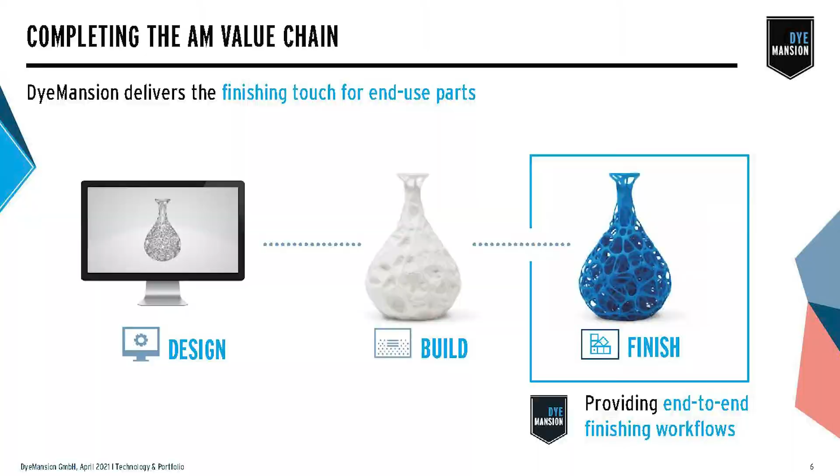So the design side is a big factor here. How do we design a part to get better? How do we then print that part to make sure it's going to work the right way within the post-process chain? These are all things that we've learned really well as a company, and we're trying to continue to educate the industry as we go, to make sure that we can all produce the right types of parts, the right ways, and have the right mindset going into it to enable that very end result.

So the way we think about this is additive manufacturing. The goal of it is to create this as an everyday unit. How do we start thinking beyond the prototype, getting these parts now into the environment to become everyday parts?

One basic way to do that is kind of camouflage. Get them into the market, get them into the areas where they're not totally noticeable right off the bat. In order to do that properly, we have to have the right type of finish where they start to replicate things that exist currently. If we're replacing a part, it's got to look a lot like that part we're replacing. If it's something totally new with a crazy lattice structure, we might have to design that lattice structure with a proper finish on it so that it applies properly into that application.

So at DyeMansion, we really continue to think about that same vision always. How do we enable the future of 3D printing to become everyday reality, everyday life? That's why we pride ourselves on the post-processing chain to create that enablement.

We do that mostly through the two different facilities we have, to help educate, and again, to create the opportunity to produce parts and also just give a basic user experience. So we have our main headquarters outside of Munich, Germany, and then we have our new facility in Austin, both of which have all of our technologies there.

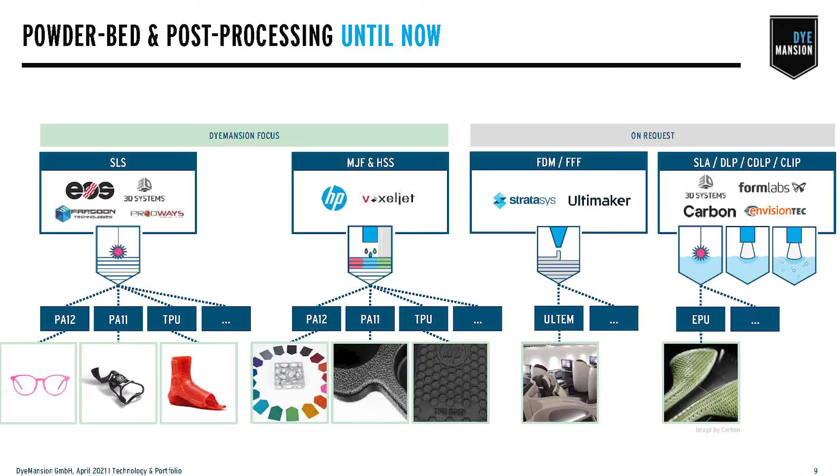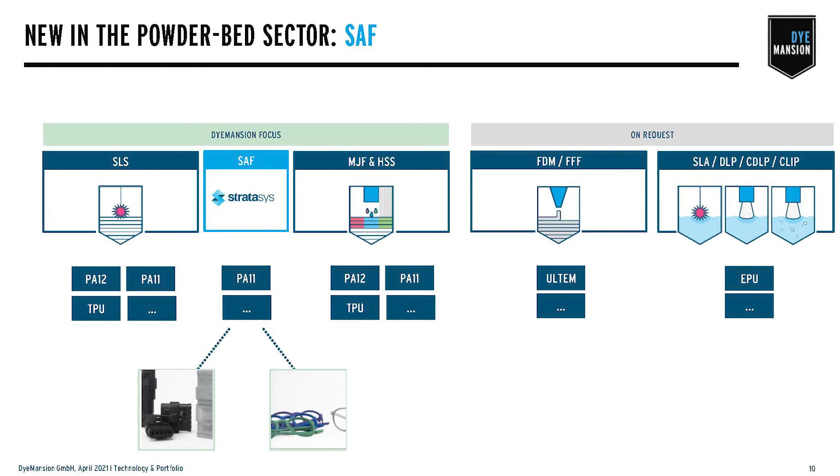Now what's even more exciting is that we can look at what's next. We always want to see what's next in the environment, and that's why we have Tim up here. What we're going to talk about mostly is where does this new material, this new process lie within our lives, and how can we continue to push it forward. Right now, the brand new technology behind SAF and the PA11 material that's out right now is something we can fit directly into our process chain. What we were thinking about, and why Tim is up here in the first place, is something super exciting for us to announce.

We did do a press release yesterday, but officially in person we can announce that Stratasys and DyeMansion have agreed to work together and create a partnership and a true alliance to enable applications at the end of the day. What that really means is we're combining the strength and market power behind the history of Stratasys, both the technologies from both of our teams, to push it forward and create a complete reference architecture for high-value end-use parts and volume according to that, or adjacent to that, all through AM. So in order for you to understand a little bit better, I'm going to hand it off to Tim for a few minutes to talk more about SAF technology and how that starts to lay into the future life.

Let me see if I can get technical. This right button means forward, right? Works so far, okay. Awesome, look at that. All right, thanks everybody. Is there a trick to this? Okay, press it about 4 times and it works.

So it's about Stratasys. A lot of you are probably familiar with us, but when we got our start, we were locked into one technology, FDM. FDM, as you probably recognize, is very good at low volume, high value parts. For the longest time, that's what Stratasys has done, even when Stratasys increased its portfolio to have FDM and PolyJet - by nature they're high value, low volume parts. That's awesome, right? But there are 7 different technologies defined by ASTM, and only recently Stratasys actually has expanded. We're into 5 technologies now.

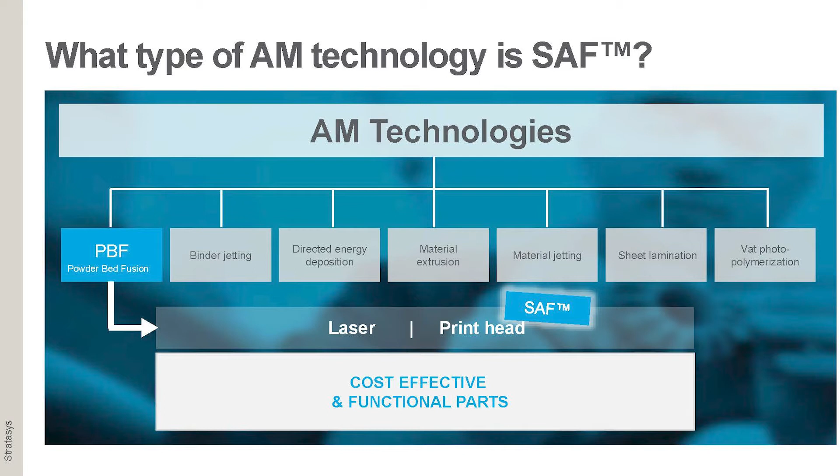So I could say really high volume, but that all depends on your perspective, right? Is it high, is it mass volume, or is it just some volume that's way more than low? Well, this is some volume way more than low. We're talking tens of thousands of parts, or maybe 100,000 parts in this type of technology.

That excited me. So anyway, that got me excited, and I said, well, to be able to jump back in the industry with a company that is really familiar and has done a lot of great things, and get into a technology that's brand new for us, and that's powder bed fusion.

So now powder bed fusion, as you all know, could be polymers, could be metals. We're in polymers, that's our focus at Stratasys. In powder bed fusion, you could have laser sintering, you can have laser-based, or you can have jetting-based or printhead-based. We are printhead-based. So today I want to tell you a little bit about what we launched last week, hopefully answer a couple of questions that might be circling in your head, and I'm sure I'm not going to do it completely justice, so afterwards you can come on up and we'll try to answer even deeper if you need.

But let's talk about our focus. Our focus is about creating a technology that gives you consistent, repeatable parts. That's what SAF is about. I'm talking to a lot of people who know what they're doing, so it's kind of intimidating, right? Many of you know more than I do about how to layer and how to do powder processing, but I'll give it my shot.

So our focus here is as we put down a layer of powder, and then we follow along with a wide area print, or a full width print of our XY plane. We have a powder application, and then we follow right along the back with a full width print head, which prints a fluid that's loaded with an absorbent material which absorbs infrared energy in sufficient quantities that as soon as I follow behind that with a high intensity infrared heat lamp, I absorb enough energy to cause melting in that area that I printed the fluid, right?

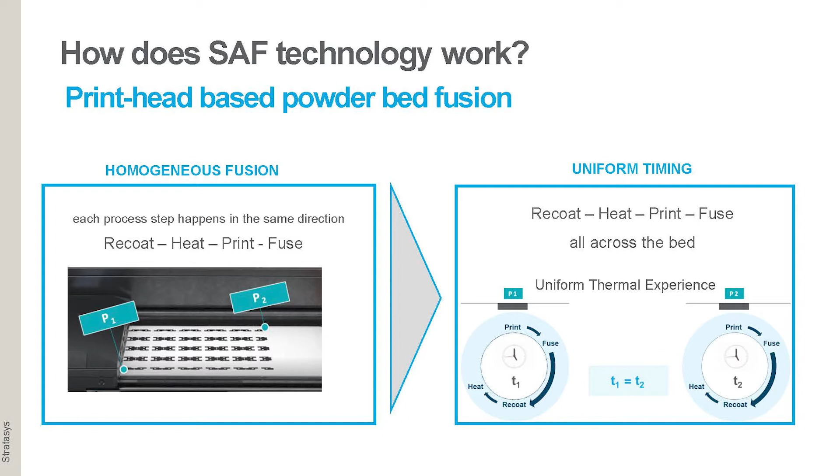So one of the focus points here is you see us identifying point 1 and point 2. So that would be like in the 0,0 coordinate, and point 2 might be in the maximum coordinate. In our case, that'd be about 12.4 by 8.2 inches. So if you go out to that coordinate, what happens is I spread the powder, and then I do the printing of the liquids, and then I do the application of the infrared. There's exactly the same amount of time elapsed between each of those three activities in each area of that XY plane.

And what that does is it gives us uniformity from every spot in the build, so that when we load up that build with a high amount of parts, we can expect a similar performance, or the same performance, from a part that's in the 0 coordinate to the one that's in the 8-12 coordinate, right?

Now, when we do that, when we apply the powder, it's applied in what we call a big wave. So we put a big pile of powder, because what's happening? The powder is cool, the bed is hot. So when we put that big wave of powder, we're trying to keep it cool as long as possible, and then we get the powder on there and then have it heat up more uniformly. And again, it's about thermal control and thermal uniformity.

Now, if we do that, then we're going to have an excess amount of powder that's going to reach over at the end, right? So we go left to right, always left to right, always left to right. When the powder reaches the end, it's going to fall in overflow. The overflow immediately is plumbed back into the system and mixed with the other powder that's already waiting in the chamber. And in fact, all of our powder mixing happens within the machine.

It doesn't happen externally. So when we do dosing, by the way, we're using PA11 here, and we mix typically at a 70-30 mix. Although we don't lock the user into that, the user might adjust that, but that's where we do our testing, at 70-30.

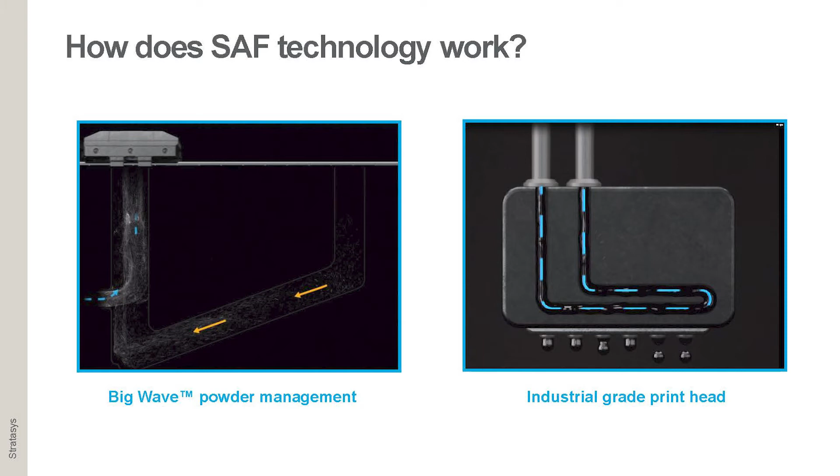Now, one thing that's interesting to say is these printheads are also used in an industrial environment today, which is a dusty environment, and that is printing on ceramics. So it already has a track record, and the way it operates, we actually don't include it as a consumable.

This is just a permanent part of the machine. So it's not a device that has a lifetime that you have to replace a unit every period. It's actually expected to last a lifetime. And if it wears out, it's included in the warranty and stuff like that, which is a little different. I'll come back to why that matters in a bit.

Back to uniformity, if we look, one of the focuses of us is to give you the uniformity in the XY plane, but give it in the Z, and also give it from build to build, and give it from machine to machine, like in variation.

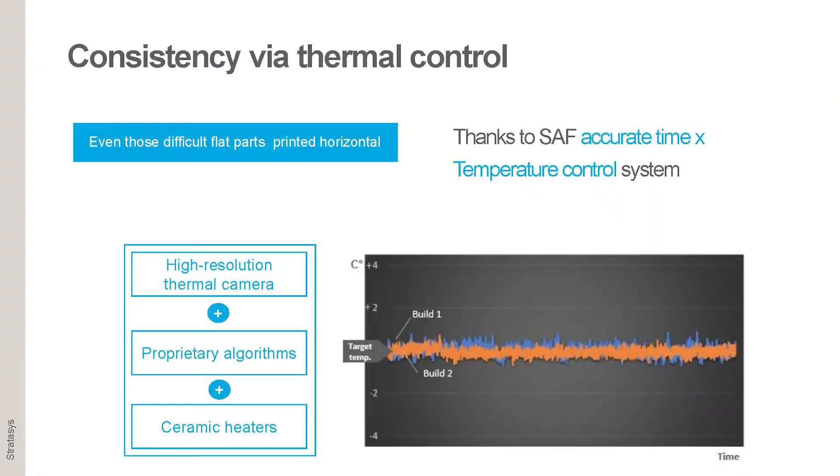to be able to export much of the data that I'm talking about so that when you do production jobs, you can also have data to follow your production. You can look back at what were the temperatures, what was happening when this happened. So that's able to give you control of the process.

An example of nesting. So of the properties I'm talking about thermally, it gives us the opportunity to have different nesting rules than a lot of people in powder bed fusion. So oftentimes you pay attention to uniformity in some powder beds, so I'm not an expert in every one, but I hear that often you look at the uniformity of how much layer density you have from layer to layer. We don't really have an issue with that, which allows us to do a couple of things.

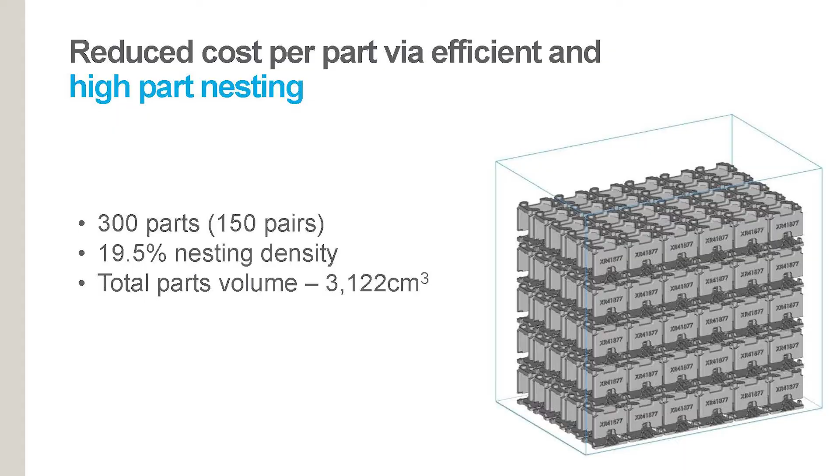One is because of the thermal control, we have a benefit in larger, flatter surfaces because, as you know, thermoplastics tend to curl and all that kind of stuff. But if you can control your thermals the way I'm talking about, then you have less of that effect. When you have less of that effect, then we don't have the same types of rules where you have to do what I said about layer to layer consistency. So we can actually locate horizontal surfaces anywhere we want.

So in this case, this example of the build, it's 150 pairs. Actually, it's a printhead device for moving the printheads around the factory. But I have some examples here. We're able to organize them in such a way that they're a little bit more efficient. That gives us a little more control over the nesting density as well.

So our typical nesting densities are 12%. But you saw there, we could go much higher, over 20 or whatever. We use 12 and the mix I told you to generate all of our comparative data, like mechanical performance and things like that, which we'll be releasing soon, but it's not available quite yet.

Awesome, thank you Tim. So that's good background on the technology from the print side. We already understand where the post-processing side lays, but to give you a quick recap of what each of those offerings look like, we'll dive into that right now.

There's a few ways to look at this. The first, and probably the best way, is understanding what that final finish really should be, or what the desire is that you want. From that you can look at what the application has to be. Is it something that's touching skin? Do we need certifications? Does it see water? Is it airflow? Does it really not matter? Is it a prototype only? All these things help you understand which process flow makes sense.

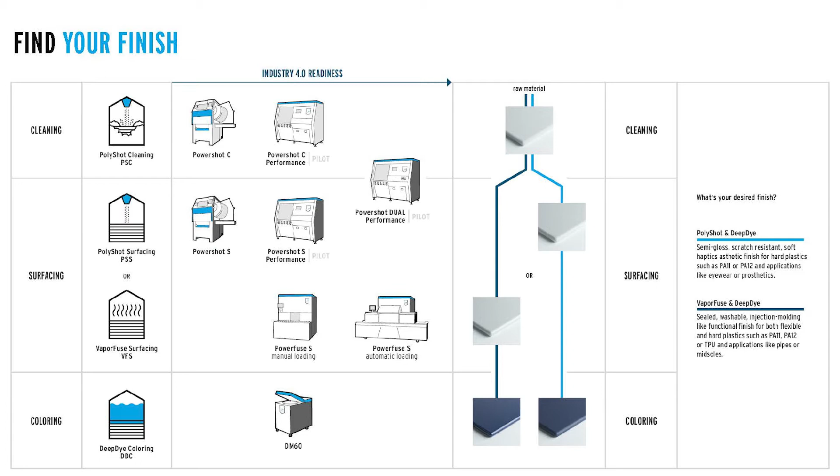So we have a few different offerings. One is our PowerShot C. I'll get into the technology behind it in a second, but essentially it's just a cleaning process that utilizes a couple of key features: fixed nozzles, rotating basket, alternating cycles, and deionization. All of these enable a repeatable process which is non-destructive to the actual part, which is really important, because we're not changing geometry, we're not removing any material, we're just getting rid of powder, that's it.

The next main process is the surfacing side. This can be done in a couple of different ways, and this is where we have to think about what that application is. One is the mechanical surfacing option, which is right now the quickest in the market to get there. It's only about a 10-minute process for standard build size on all platforms out there. It's again a non-abrasive process - all it is, is impacting, to create a more homogeneous surface. What that does visually is change the way light's reflecting on the part, giving you a more uniform visual appearance. It also increases the scratch resistance of the part, along with a few other properties. Again, just a quick 10-minute process.

Now if that application needs to be watertight, for example, that's where vapor technology comes into play. There are a few different options out there, of course. We have the PowerFuse, which is our vapor technology. What this does is introduce vapor into a processing chamber, which enables it to actually create a totally sealed surface on that part. This is really important if you need that watertight, airtight type finish, or something that's washable, for example.

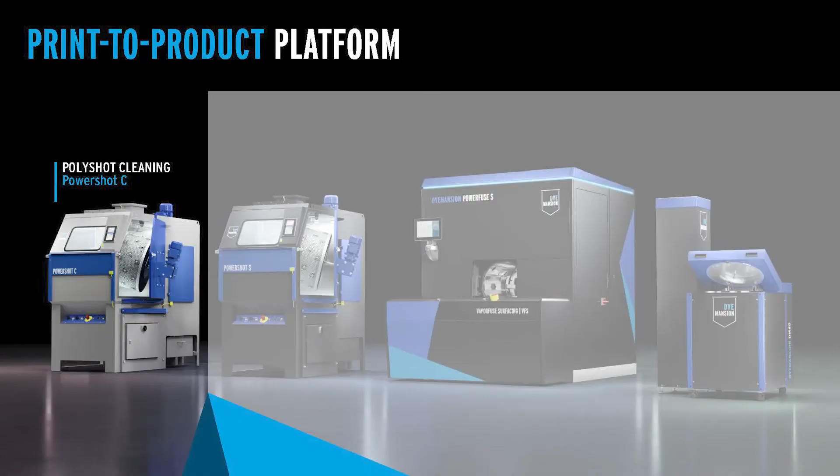What this really does, as we talked about, is very simple. It's just on the depowdering side. The key thing is it's powder removal, not actual material removal. So we're taking a part right out of the powder cake, simply shaking off the part, and tossing it right into the PowerShot C. Roughly 8 to 10 minutes, depending on the type of part, how fragile it might be, or what the application is. That part is then totally cleaned off, ready to go into the next stage, wherever that next stage might be. Let's just talk in basic product portfolio line here.

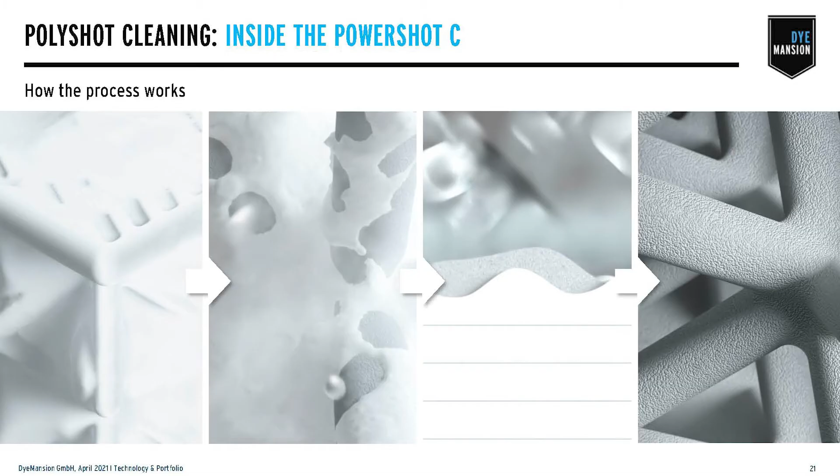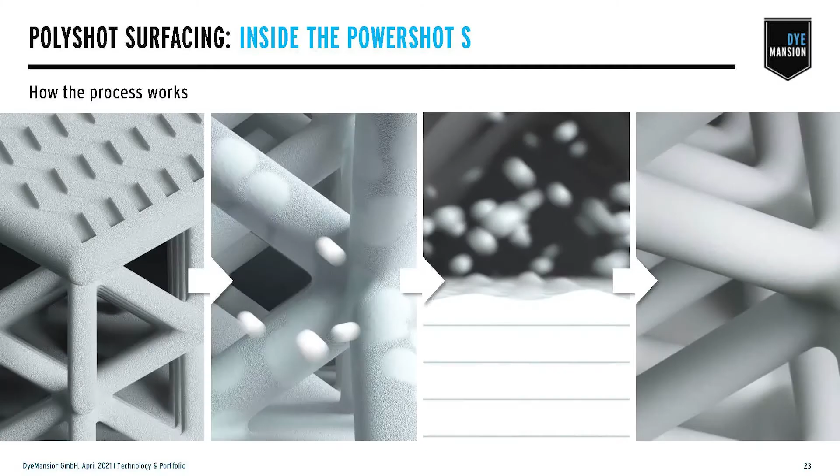So the next stage in this case would be the PowerShot S, which is the mechanical surfacing option. It's a very similar technology, again a media blasting with a couple of fixed nozzles and a rotating basket. The key here is that it's actually a proprietary polymer blend of media, so it's non-destructive and non-material removing on the part. It's strictly just knocking down those peaks and valleys to give a really smooth, homogeneous surface on top.

Now again, this is just looking at it from a technical point of view, but think about it from the application side. One of the greatest examples we have, we'll talk about it soon, is eyewear. Something that's on your face all the time. Half the population really has them. We currently are involved with millions and millions of units of eyewear a year that only use the PowerShot S as one of their main finishes, strictly because it still has that industrial look, but it applies a scratch-resistant surface that's also capable of being on human skin, with perspiration, skin irritation, cytotoxicity, all these things that come into play that a standard porosity type part right off the printer will not work that way.

Looking a little bit more at the technical side of things, going into the next system, the PowerFuse.

So this is a little bit longer of a process, and this is using vapor technology. Similar idea and concept as other vapor technologies that exist, one of which, of course, we'll talk about soon, but Stratasys is up here as well. They came up with these ideas long, long ago. Vapor technology has been around in the industry, both in metal and plastics, for a very long time, over 20 years at this point, easily. We just kind of took it and advanced it a little bit, just like others have already done.

Parts are suspended within a process chamber, so now we've got to think about how we design that part a little bit better. This goes all the way back to that initial stage. Maybe we need to design a special mounting loop or way that we can suspend that part within a processing chamber to avoid any visual discrepancies or to speed up processing overall.

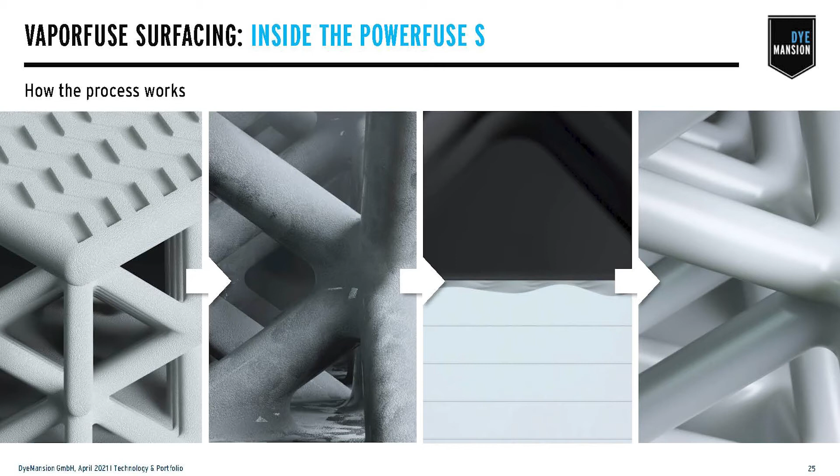Vapor is introduced into that processing chamber, and essentially what's happening is that vapor is now condensing on a part, allowing it to actually realign and reshift some of those molecules on the outer skin. Very minimal interaction there, and all it's doing is creating a totally sealed surface. So now that surface can go right into an application that might need to be washed, whether it's in a medical environment, food and beverage type environment, or maybe it's just something that needs a glossy surface for visual aesthetic.

And the last step of that whole processing chain is the color. Again, what we talked about a little bit in the beginning, maybe it's a special customer that needs a unique color matching palette, or maybe it's a part that we would consider high volume, a few hundred thousand units, but they all need to be exactly the same color. Really hard to do that when you're mixing chemicals on your own or making batches in small volumes that have really short shelf lives. That's where the DM60 comes into play, and it's a completely hands-free process.

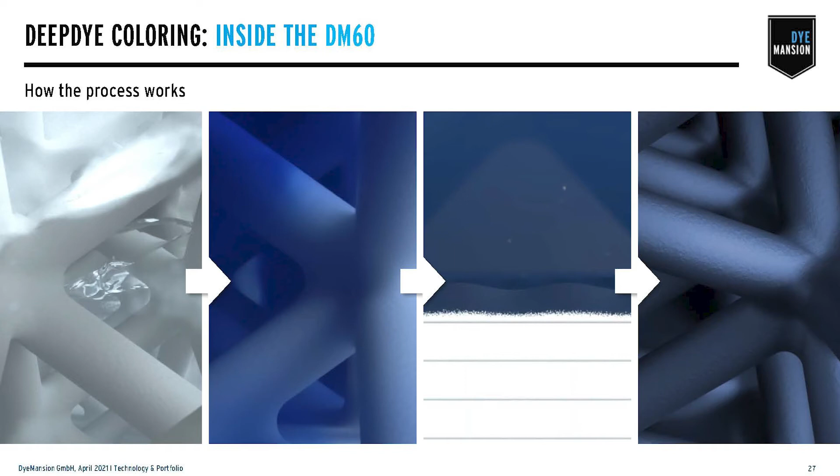So the user is really just scanning a cartridge which is already identified as what color, what material, and what process it is that has been seen prior to color. That's really important because that goes back to your design, to your build phase. All these things play a factor in how we actually apply color in the best way possible. Through the DM60, we are essentially using a high pressurized water bath, but the process of adhering chemical is very different from a standard stain or paint. There is no geometric change to the part. It's actually going into the part.

On general terms, it's around 200 to 250 microns of penetration depth. What that enables is we now have no worries of scratch resistance or that color coming off the part in normal environments. It also means that whether it's a part being assembled to something else, we don't have to consider as many worries of transfer, so dye transfer standard testing in that regard.

Another way to think about it is applications where a part is in an external environment seeing UV issues. Standard dyes and standard paints will be affected really badly by different environmental aspects, whether it's temperature, humidity, or UV light. The dye that we have, with a couple different options, even includes a UV stabilizer for one of the options, which allows you to enter into some of these markets at high volumes and still meet all the requirements set forth.

So you learned a whole lot about who we are company-wise, and a lot of information about technologies. Now, why we're actually here is, what does that even mean? How do we apply this to real-world stuff?

The next step of what this really looks like, I'm going to hand it back to Tim in a second, but so you understand where everything lies as a picture, from the initial design phase to the print phase to the post-process phase. From the design and print phase, that's why Tim is here, that's why Stratasys is here, with the relationships they already have in place from the design portion to the actual printer and the technology behind SAF. After that phase, it fits right into the normal work process flow we already have implemented and proven throughout the industry for many years.

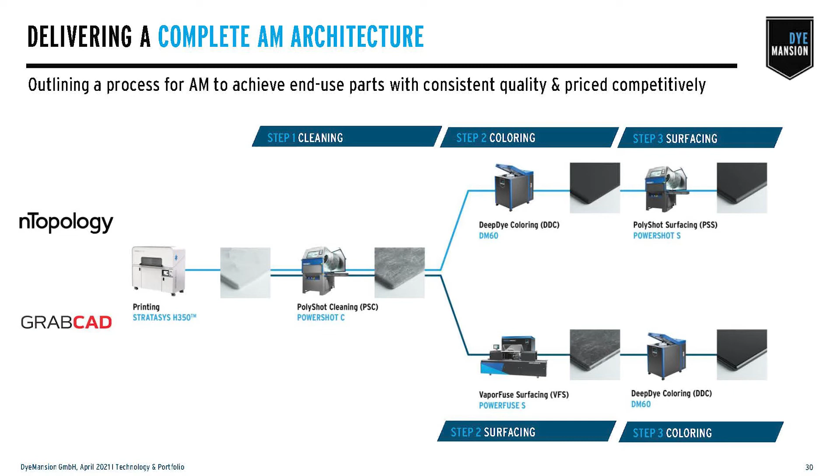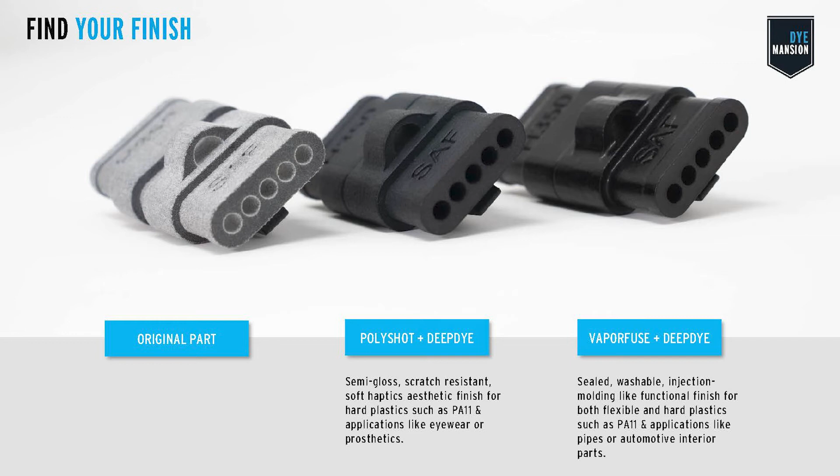So that's the polyshot finish with the dye, dye first, then surface finish after. The part all the way on the right-hand side is the bottom half of the path we just talked about: that's the vapor finish, then dyed afterwards. Really cool to see those, and we have those parts right up here so you can see firsthand what they look like, what they feel like, any difference in weight, if at all, there's none, and the surface texture and geometries, what may have changed, and how that process looks.

The reason we have that picture up there is to get your brain flowing a little bit towards that end use, what those applications really are. So I'm going to pass it back over to Tim, and we'll talk a little bit more about the vision side of this: why are Stratasys and DyeMansion doing this?

Stratasys, we learned a long time ago, even when we weren't in the higher volumes, that people need more than just exactly what comes off any given product as a 3D printer, right?

You have more requirements. I'd say Scott Crump recognized this almost 20 years ago: the layer thickness on an FDM part was often not the desired surface finish. People were asking how to get a certain look, so Scott started pushing internally on developing vapor smoothing for FDM parts. Even though I'm representing SAF here, this doesn't mean it's the only application for a DyeMansion product, it could apply to different technologies within Stratasys' portfolio. Stratasys developed vapor smoothing, even got patents on it, and had our own machine. We don't sell that anymore, but we saw the opportunity since we're getting into higher volumes. We need more automation, more options for different surface finishes, whether colorants or smoothness, and we have to clean our parts. In SAF, you have to blast the powder off. So we needed solutions like this, and recognized the need to do things beyond the printer itself. It started way back then.

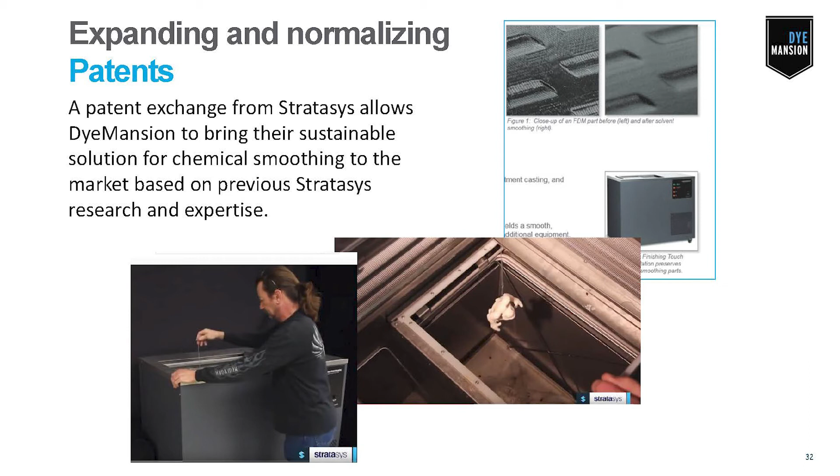As part of this relationship this week, we're able to do a patent exchange, giving use of our IP to DyeMansion, which is exciting because we don't do that internally extremely well. So we can take our output and give it to another expert process to give the customer what they really need.

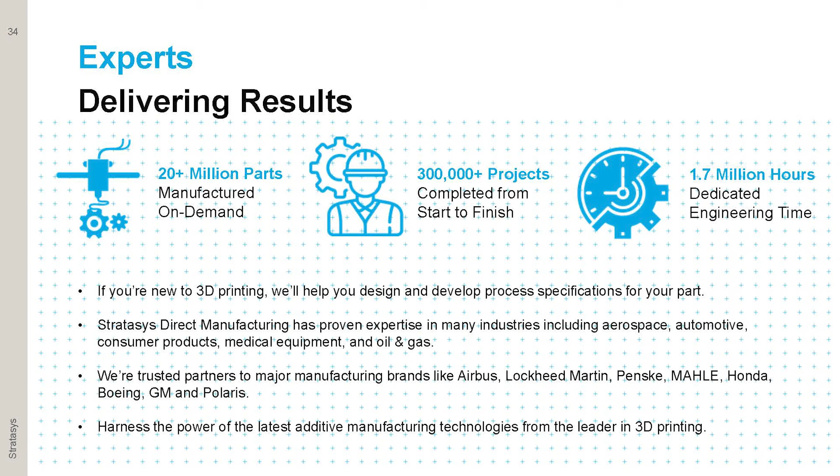Now yes, we make printers, we sell printers and all that. But users want a full solution, and what better way to test that solution than within our own house? Many of you are probably aware Stratasys doesn't only sell machines, we sell parts through Stratasys Direct, a very high volume parts producer. We're technology agnostic when it comes to additive, in fact we have things which aren't additive at all. We manufacture in a lot of different ways at Stratasys Direct. So not only do we do additive and other manufacturing, but we have needs for post-processing as well, and we test some of that there. We have different solutions, and one thing we'll be doing very shortly is testing in bigger volumes the technologies presented here today from DyeMansion, so we have the opportunity to test them before customers deploy them at their own sites.

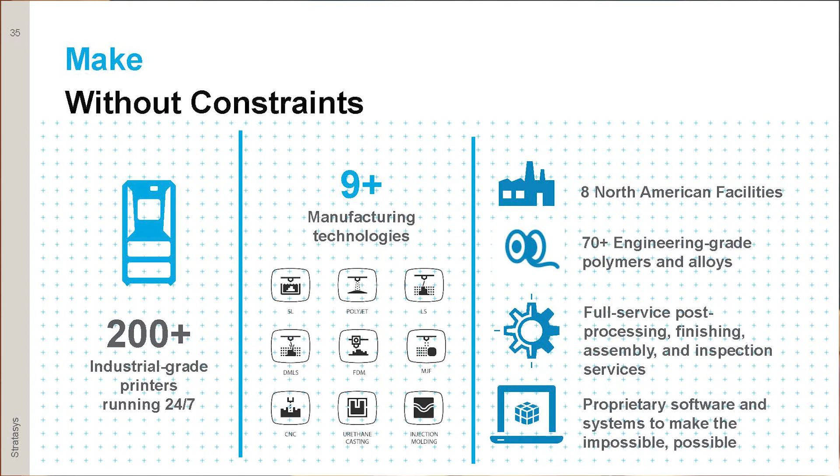That's exactly right, and the whole point, as Tim said, is to test it, field test it. It's what we talked about earlier, having a couple different facilities with the technology there to test them. The whole point is to actually prove it out before we just throw it into the mix of hundreds and thousands of units. So where do we stand today?

There are a couple main pillars across different verticals where we already have a ton of work. A lot of you are here because of that, you're already aware of these areas and probably working in most if not all of them. The industrial side is a great example of where 3D printing is really easy to implement: replacing spare parts, getting rid of inventory. That's one of the big reasons additive came around, getting rid of inventory, space on shelves is really important. The right finish is also critical in these processes because something in an industrial environment gets beat up. With traditional methods it might be easy to keep replacing that part, but over time that becomes expensive. Having the right surface finish lets you extend the life of the part. Then of course there's the color side.

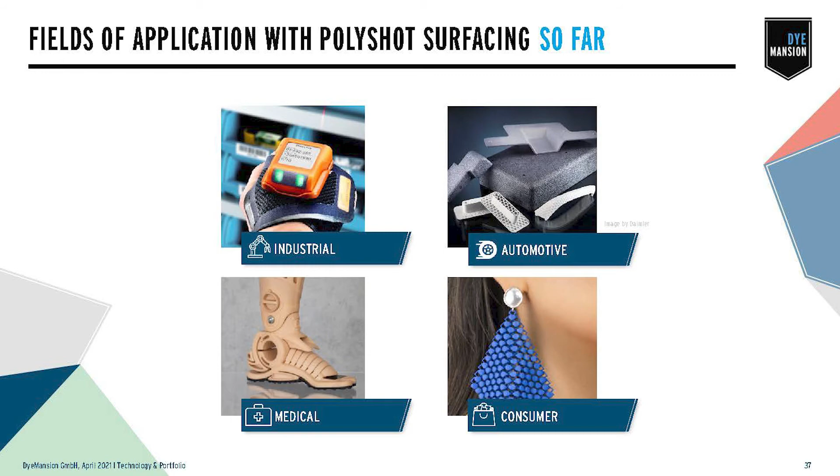Orange, of course, very industrial. That top left example is one of our biggest customers, ProGlove. It's a fully printed component with an electrical item on the inside, a handheld scanner. That eliminates needing one hand to always hold a scanner during the inventory stage, so now the user has two free hands, just wearing the scanner on top of their hand. We've seen plenty of their products go out, and we've seen them come back totally demolished.

That's why we've run it through the different process to actually enable it to be beat up, run through all these different processes. We have a couple of different colors with them that mean and signify different things within their production floor. The automotive sector and the medical sector are really key ones to show off certifications.

Medical makes sense, right? Medical has all the different certifications around biocompatibility and everything encompassed within that, which is very difficult to understand sometimes. The automotive sector is also very difficult to understand. Automotive has your basic ISOs, but then guess what? Each one of the main OEMs has their own one that's a spin-off of what that ISO is.

Standard ISO certifications for light and heat resistance - GM has their own, Toyota has their own, Ford has their own. They're all spin-offs that maybe it's only a little bit of a variance, but it's a really important factor to understand when you're making that part, how do you actually meet those certifications? So we already live in that bucket as well, as we explained through some of the different processes.

And the last one, which is pretty personal on my end, the consumer side. I actually came from consumer good products with printing. There's a lot of really tricky things about this because you're not just dealing with products that are always in use, you're dealing with opinionated customers too.

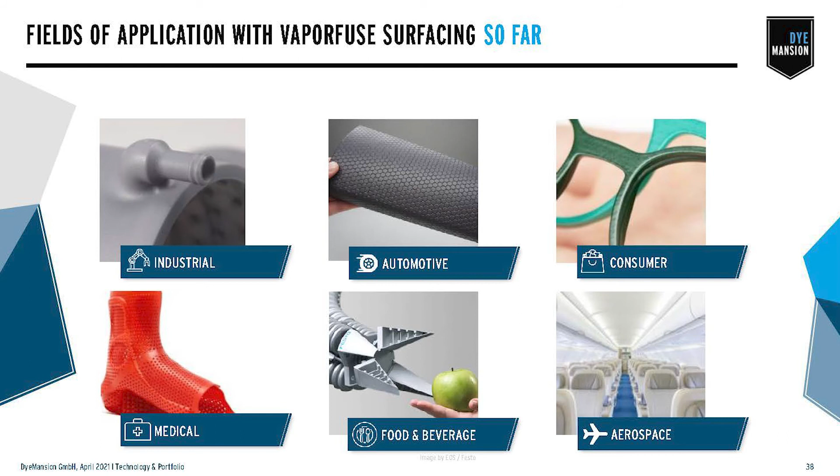Food and beverage is very similar to the industrial side, where it doesn't always have to be on the end side. Of course, it's not going to be a food product - you're not drinking it, you're not eating it, but maybe it's used to hold that product, or maybe it's a plate that needs to be washed, or maybe it's an actual gripper that moves parts, a pick and place type product. We have a lot of applications already using that kind of technology, and the reason they're using a VaporFuse part is because now it's a smooth surface.

When it's a gripper that moves back and forth, particulates don't stick to that. Where if it's a porous part, particulates now stick to that. Now they have to interchange that part or stop production to clean it. Smoothing that part enables them to continue production lines without stopping. It's a really cool thing to think about, and a really simple process.

So those are some of the areas that we currently live with, the two main different types of surface technologies, all of which have their different requirements for color, of course, and everything always starts with cleaning. So the two main areas that change are the two surfacing technologies.

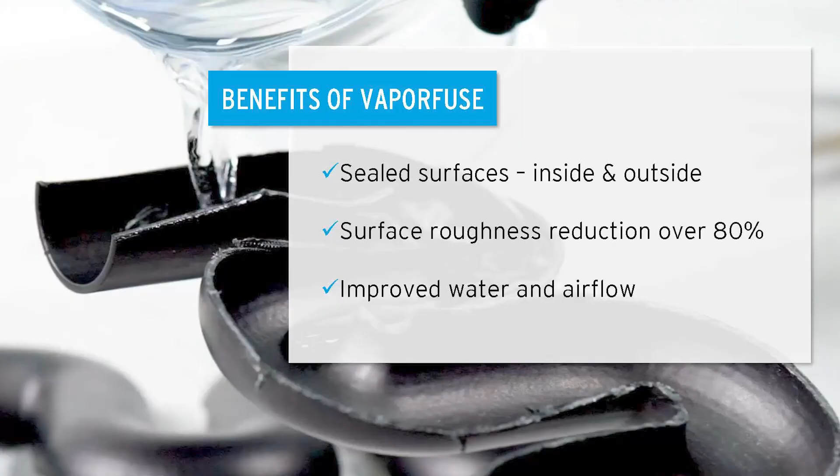As we talked about why smoothing an object might be really beneficial, one thing to think about is our inner channels. Why does it work in an industrial environment? Smoothing a product totally smooth on the inside of a standard tube allows for the increase of airflow, increase of water flow to actually meet what you're actually designed.

That napkin sketch that you designed, when you print it, you want it to meet what you actually wanted to do, right? So smoothing it through our technology, we can actually reduce the surface roughness by over 80%, which is huge. It's not perfect, obviously, but it's really, really close to getting there. And what that enables is that your part can now do what you want it and intended it to do.

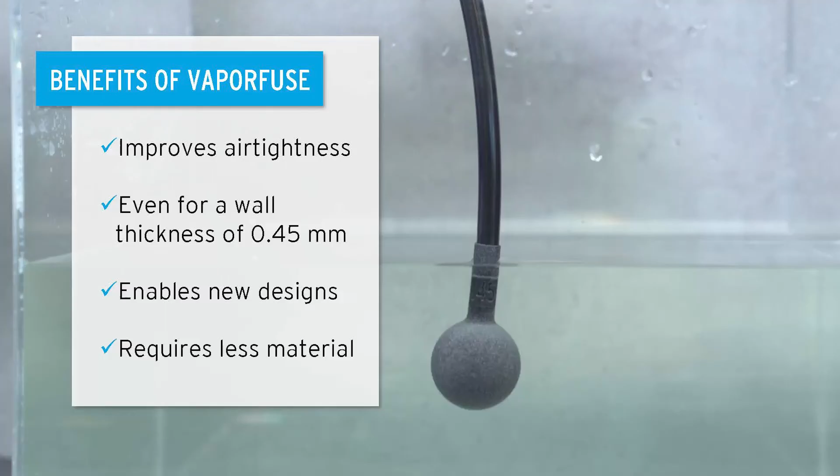The other side of that is now it's watertight, now it's airtight. And we've actually been able to prove and test this, and we have a lot of these videos online so you can actually see how we did it. These are not ISO standard tests, right? These are putting a part to a test that we've created to actually see what it looks like, to actually try to make it fail, really.

So we've actually seen that we can totally seal a part underwater, and we've used, I believe this was 4 bar, with a wall thickness down to 0.45 millimeters. Now, what does that mean? Think of it from the cost side of things. Now we don't need as much material to create a solid wall that needs to be used in an airtight environment. We can use less material on the design side, save money over time.

All we're doing is changing the finish. Not only do we have to think about using less material, but now we can use a different design. Maybe this wasn't an area that we could do before with 3D printing. Now we can actually 3D print something, get rid of a traditional manufacturing environment, have a sealed surface, and enable a product to be used in an airtight environment.

The last one is also very important for industrial environments or medical environments: a surface that now can be used, cleaned, and beat up with harsh chemicals. So what we've seen through different testing and industries that we're already in, and products that are in the market currently, is that a part that's now been smoothed can be used in areas with harsh chemicals like oils.

And now even crazier than that, the oil removers, so chemicals that are meant to demolish the way particulates stick to one another and then remove them. What we've seen is that the sealed surface actually stands up against that. So now that printed component doesn't have to be scrapped once we use it in an oil environment, like a filter, for example. We don't have to toss that part and reprint a new one. We can actually just seal it and enable that part to have a repeatable life cycle.

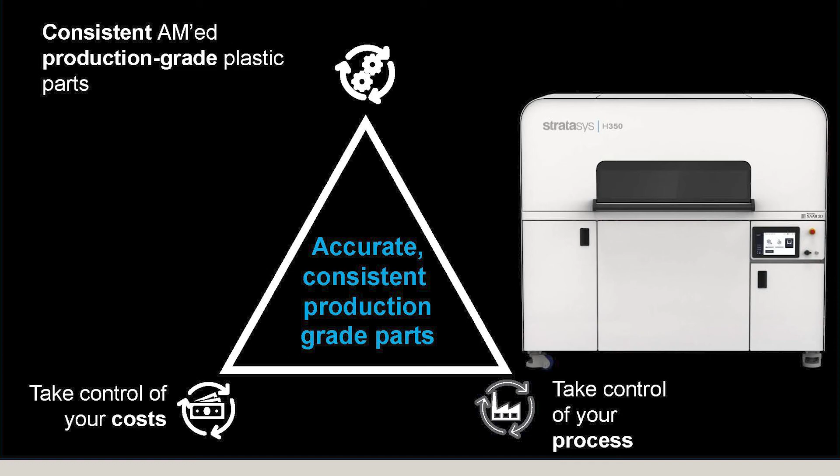We're serving, of course, those same industries that Mike was talking about. But let's look at some of the parts. Now, we have some parts up here, and we don't have a plethora of them out there for you to look at yet today, right?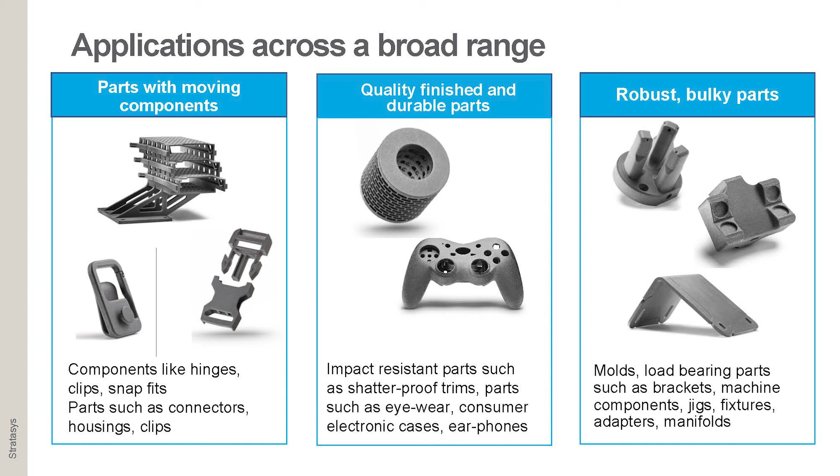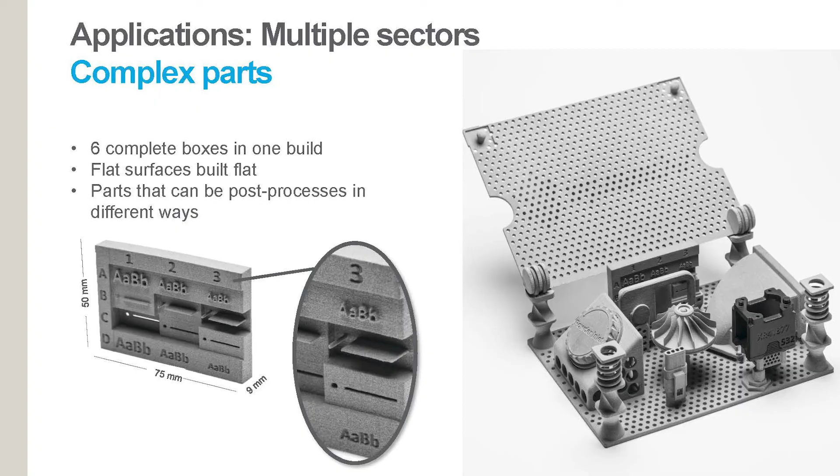But one of the things we see, along with the consistency of mechanicals and accuracy, is surface consistency. So what do we do really well? We do some fine detail really well. I have this part up here as well. We do bulky parts very well, which is maybe a strength for this powder bed fusion compared to some others. I'm not an expert in all of them, but it's nice that we can do bulky parts without a lot of challenge.

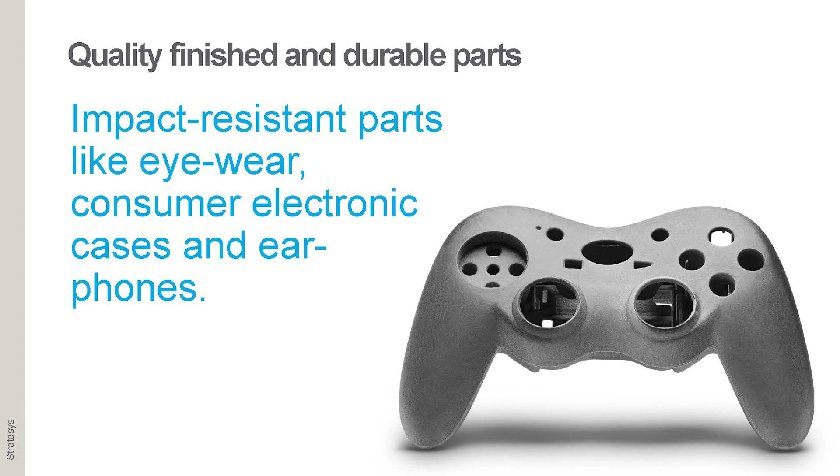We have good surface consistency. We could imagine one day we'll have an end-use part—it'll be this part in somebody's hand. Maybe it'll be vapor smooth, maybe smooth enough to be a consumer part. That leads to my closing comment.

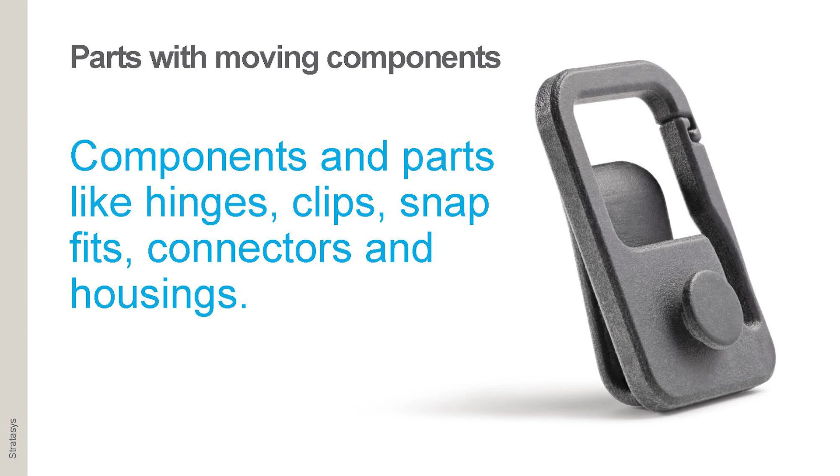All right, you look at this. It looks really great. We talk about end-use parts, right? Okay, we're going to take a part like this. Is that end-use? I don't know. Tim's not going to get on and buy it for $5 at Walmart. So I don't know—is it end-use, or is this a component that's going to be in an end-use part? This is probably going to be in an end-use part.

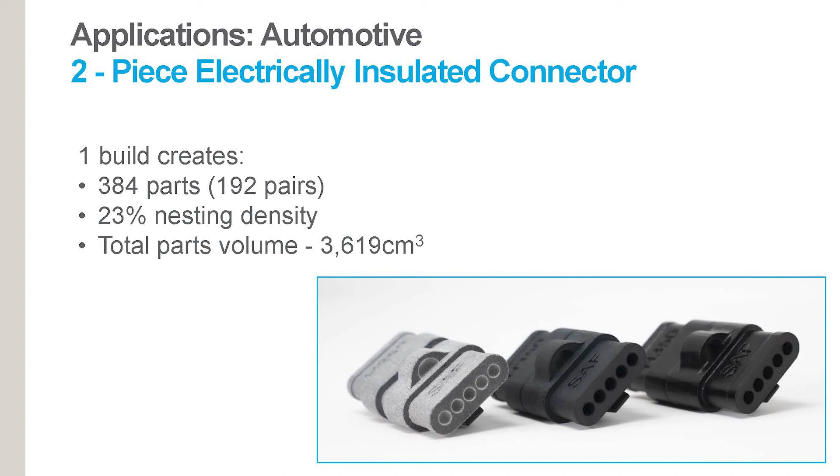What's the end-use product? It's a car, right? So now you start thinking, well, what's the real thing here? The real thing is, we've always talked about in additive manufacturing, how could we disrupt supply chains? How can we affect inventory? How can we get to an end-use part? How can we get volumes of parts? How can we maybe compete against injection molding tools? Because we don't replace them, we all know that.

But if you find new ways to bring in ROI and new ways to introduce applications to additive manufacturing, which will eventually become an end-use product, maybe we will affect that supply chain in different ways than we ever did before. But to do that, we have to consider that 3D printing is just a piece of that supply chain. And even if it sits in this room and I have an H350, well, I have front-end stuff to manage.

I have to manage the design. I have to manage the data. I have to track that data and trace it through with the part. Then I have to get to the other end of the machine. Now I have to clean the part. Now what? Well, I need a smooth part, I need a colored part or whatever. That's where maybe DyeMansion is.

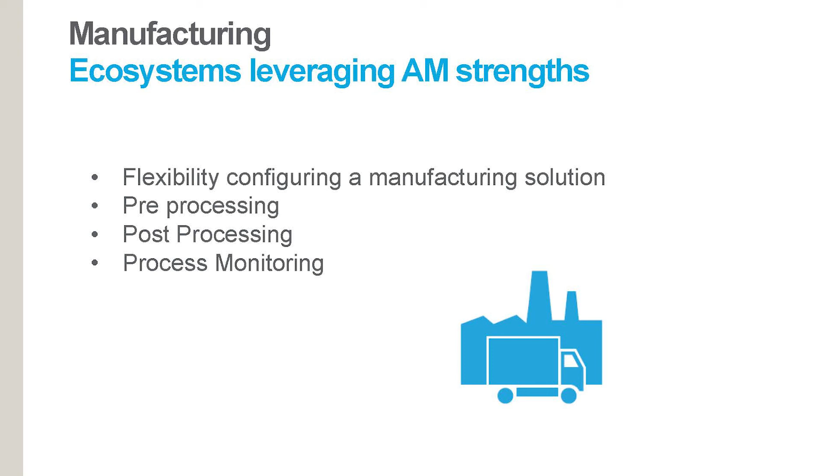Then you go, well, what if that connector needs to go into something else? Let's not say a car—let's say something smaller. So, well, maybe we need automation. Maybe we have to have an automated way to get the parts out of the machine and then do something with them. Maybe do a machining operation—you could machine an additive part, and then maybe it moves to another work cell and gets added to something to create a bigger assembly, which becomes an end-use part.

If we're really going to do supply chain, it's not just 3D printing. It's more than that. So from my perspective, and this is Tim's perspective, we have to create an ecosystem of more things to complement additive and let additive make a great core, but then let's add things to create the real supply chain disruption. We found out last year how supply chain can be disrupted in the wrong direction. Let's help disrupt it in the right direction, right? That's where we want to go.

Yeah, and Tim's exactly right. The idea is it's the vision moving forward. We talk about all the applications and places that we're already at, but we have to understand there's still a lot of work to do to get to that next step. The whole idea behind this is to help create that vision, enable you, but to really get the brain flowing. How do we all work together? One of the ways is what we're doing right now—creating an alliance using the strength and knowledge between two different companies, applying it together to create a totally full solution from the design side all the way to that final part. There's still missing pieces, of course, there always are, but the idea is to help fill in the gaps and create that future vision as we move forward.